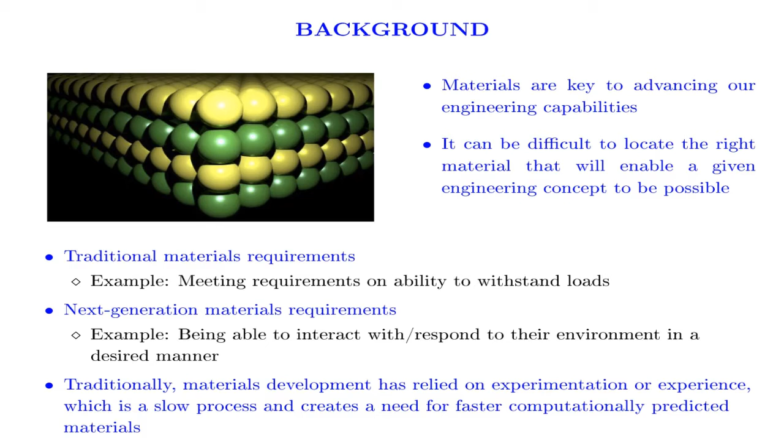The advancement of engineering capabilities are often tied to the materials used. It can be difficult to identify the right material that can make an engineering concept a reality. Traditional material requirements focus on properties such as withstanding a certain load, while next generation materials demand dynamic requirements, such as responding to their environment in a certain manner. Traditionally, materials development has relied heavily on experimentation or the experience of individuals, which can be a slow process and creates a need for faster methods such as computationally predicted materials.

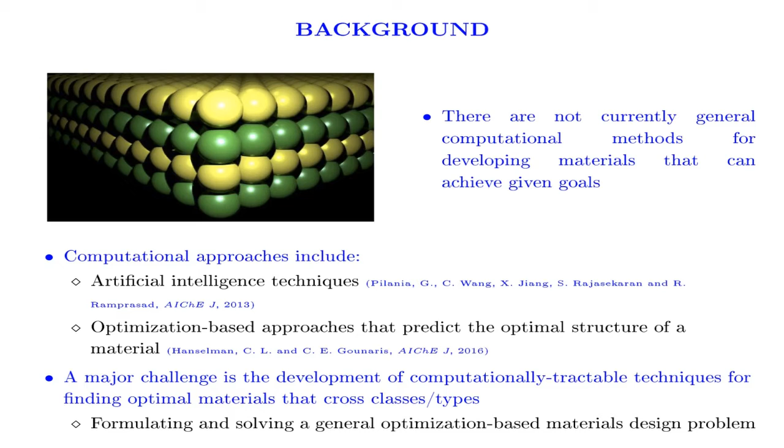There are not currently general computational methods for developing materials. The above mentioned computational approaches include artificial intelligence techniques and optimization based approaches that predict the optimal structure of a material. A major challenge with finding optimal materials, irrespective of class or type, is the development of computationally tractable techniques.

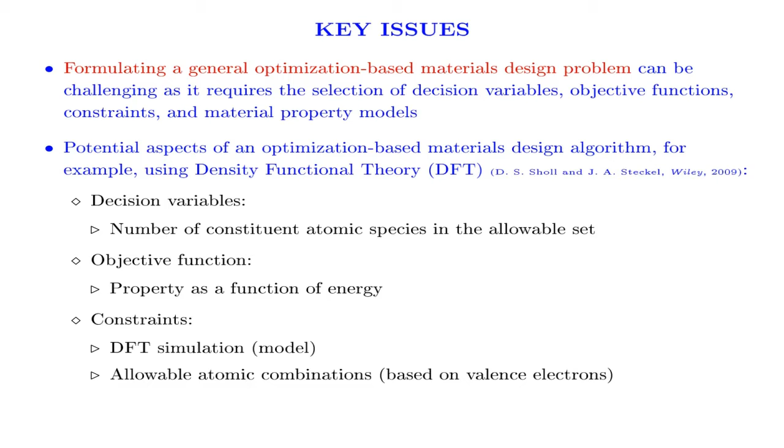Formulating a general optimization-based materials design problem can be challenging as it requires the selection of decision variables, objective functions, constraints, and material property models. If the material model is determined using density functional theory, or DFT, then the number of constituent atomic species of the molecule represent the decision variables. The objective function can be represented in terms of ground state energy, and the constraints include the molecular model obtained from DFT and all allowable atomic combinations based on the number of valence electrons.

As illustrated earlier, if the optimization based materials design algorithm utilizes a molecular model based on DFT, then the ground state energies of molecules can be determined. However, there are potential challenges we see with using this method: first, computational tractability; second, the solution obtained may not be highly accurate, as molecular inputs require experimental validation which may not be available, especially while dealing with new materials. Other reasons for inaccuracies include insufficient K points, inaccurate Bravais lattice specifications, or pseudopotentials.

Despite these model inaccuracies, a material predicted by an optimization based materials design algorithm solution should be robust, or in other words, have the expected properties in practice. Robustness should drive model selection and optimization based materials design formulation. Robustness in optimization based techniques has been a topic of interest in various areas of process systems engineering, and it would be expected that techniques for handling different concepts of robustness could, in the future, inspire ideas for formulating an optimization based materials design technique.

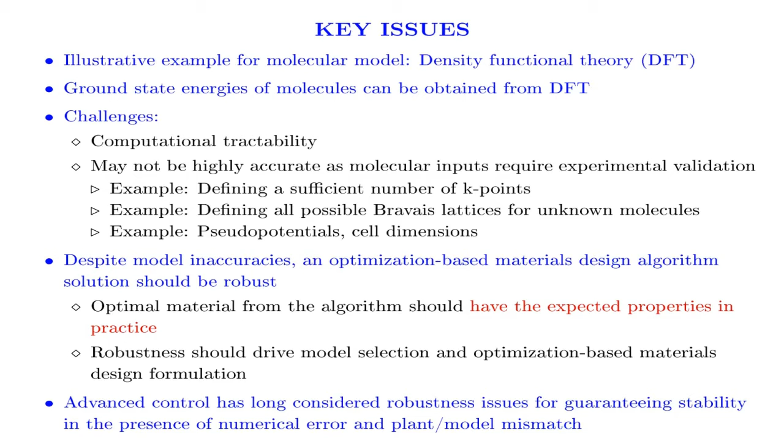Our group generally focuses on chemical process control, where robustness is a concern with respect to stability. Though this is different than the issues that would be faced in robustness with an optimization based materials design algorithm, the remainder of this talk will focus on several issues related to robustness in advanced control that our group has recently worked on. The control theory that we will take advantage of in this presentation is an advanced control formulation known as Lyapunov-based economic model predictive control, or LEMPC. This is a model predictive controller that explicitly optimizes economic performance and incorporates Lyapunov-based stability constraints.

Now that we know the control strategy to be implemented, there are a few assumptions that we make about the class of systems that we will be dealing with. We consider a class of nonlinear systems with bounded disturbances and bounded inputs. The subscript I represents the change in dynamics of the real process. We consider that the origin of this system is stabilizable in the sense that there exists an explicit stabilizing control law h of x that can render the origin of the system asymptotically stable in the absence of disturbances.

The system is stable in the sense that there exists a strict Lyapunov function v for which the time derivative along the closed loop state trajectories under the controller h of x is negative definite for all x in the neighborhood D of the origin. We define omega rho I as a level set of the Lyapunov function in D as the stability region where the state constraints are met.

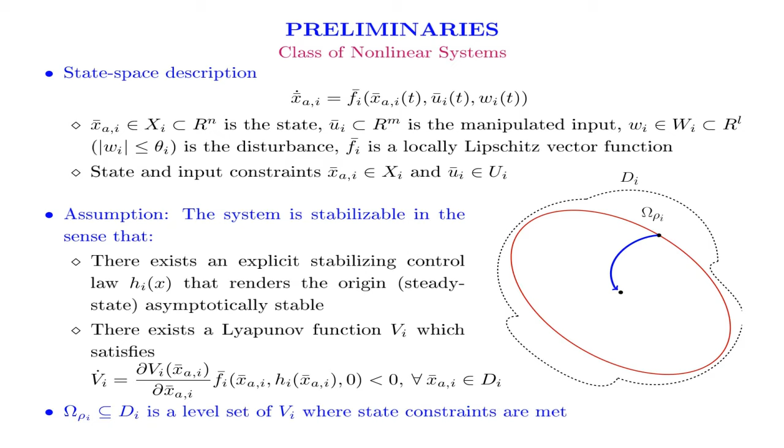The same assumptions as discussed in the previous slide are made on the empirical models. The change in the dynamics of the real process are captured by the empirical model and represented by the subscript q. We define omega rho safe q as the level set of the Lyapunov function, in D as the stability region where the state constraints are met. We define an additional region omega rho q within omega rho safe q to account for the changing dynamics of the process.

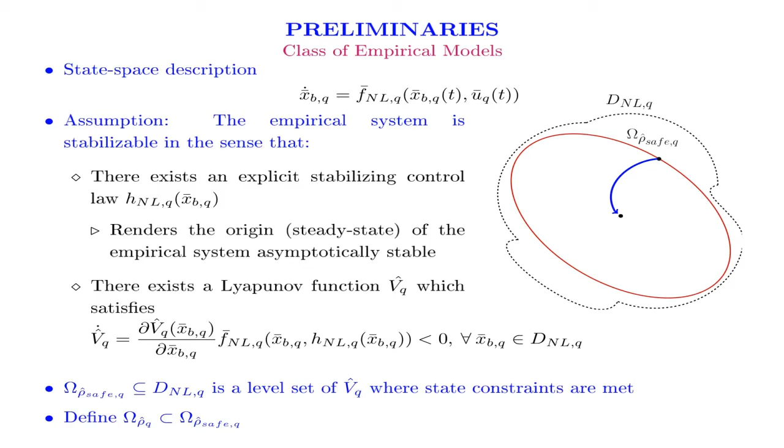Now that we have defined our class of systems, we can look at how LEMPC can be used on a nonlinear system whose dynamics change with time. The LEMPC formulation here uses the subscript q to indicate the change in the dynamics of the empirical model to emulate the dynamics of the real process. The economic cost function is given by the first equation, which is subject to the constraints defined by the empirical model, the state and the input constraints, and finally the Lyapunov constraints highlighted in red and blue.

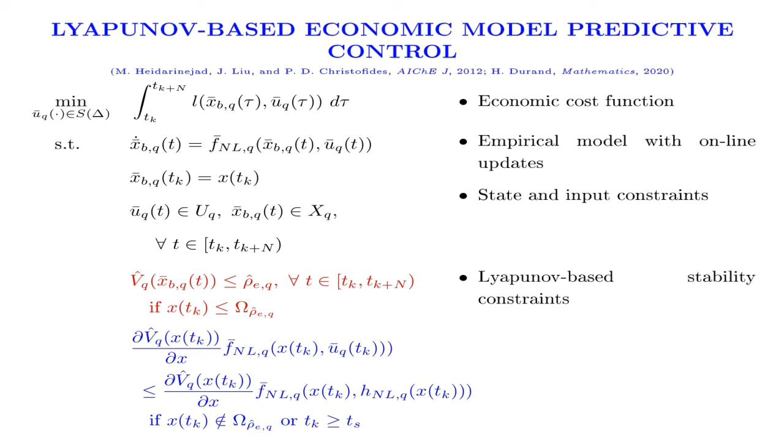LEMPC is a two-mode advanced control strategy. In this slide, we look at the mode 1 operation of LEMPC. A Lyapunov-based explicit stabilizing controller h_NL,Q is used to design the stability constraints. LEMPC may operate the system in a time-varying fashion while maintaining the predicted state trajectory in the region omega rho hat EQ, which is a subset of omega rho hat Q, thus guaranteeing closed-loop stability in the region omega rho hat Q.

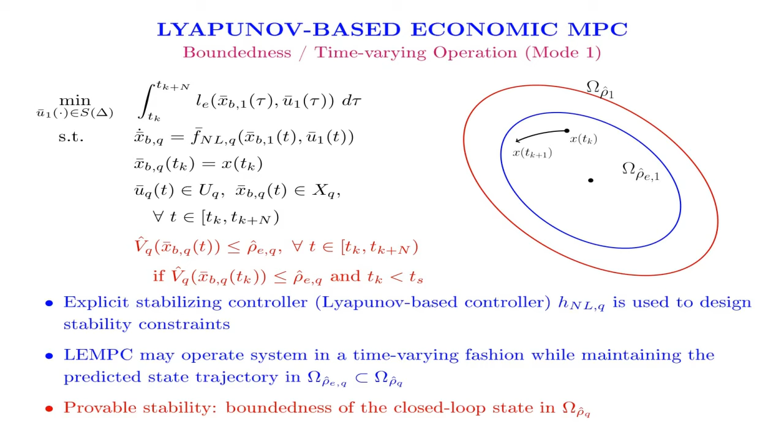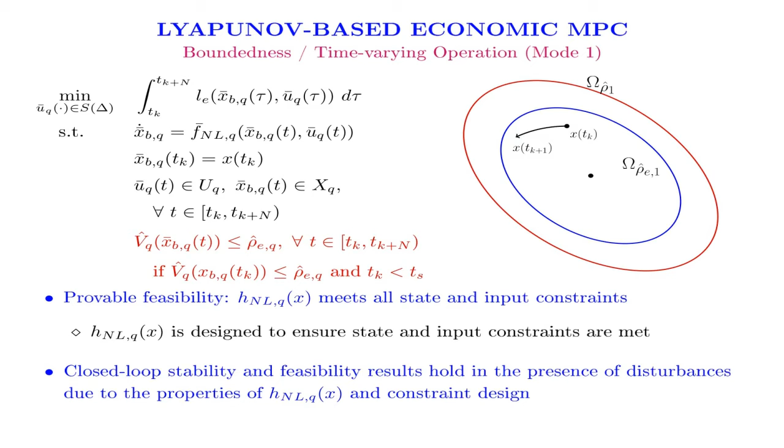The Lyapunov-based explicit stabilizing controller HNLQ is designed to ensure state and input constraints are met. The closed-loop stability and feasibility results hold even in the presence of disturbances due to the properties of HNLQ and the constraint design. The Mode 2 control action of LEMPC ensures that the computed Lyapunov-based explicit stabilizing controller HNLQ decreases the value of the Lyapunov function.

If applied consistently, this constraint could drive the state to a neighborhood of the steady state equilibrium point, thus maintaining the feasibility and stability requirements of the system.

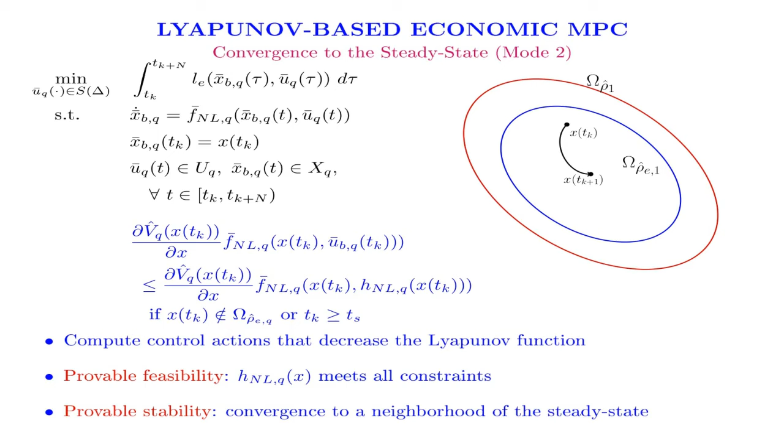Now that we have discussed the original formulation of LEMPC, we look at a case where numerical error is introduced to the control system. A truncated Taylor series approximation of the solution to a nonlinear process with the same characteristics as described in the class of systems and under the control action of LEMPC is used to demonstrate the handling of numerical errors. The Taylor series truncation error is used to derive the relationship between truncation error and closed-loop stability conditions.

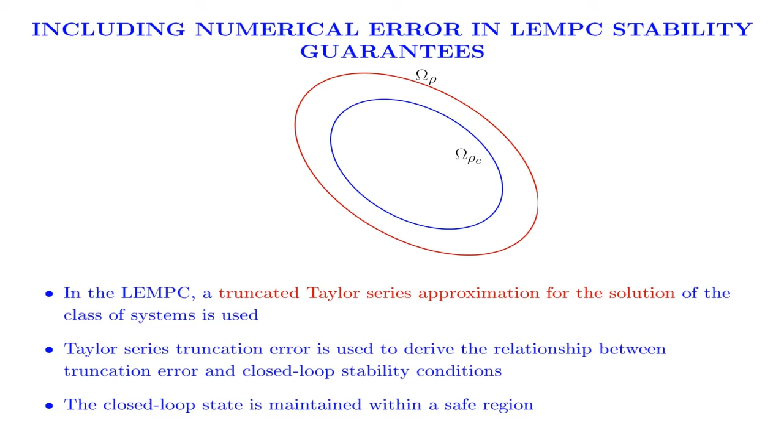The closed-loop state is maintained within a safe region using the LEMPC formulation. In order to illustrate this, we use an example of a standard CSTR with a general second order exothermic irreversible reaction A gives B, whose state equations are listed here. The control objective is to regulate the process in an economically optimal time varying fashion while maintaining closed loop stability.

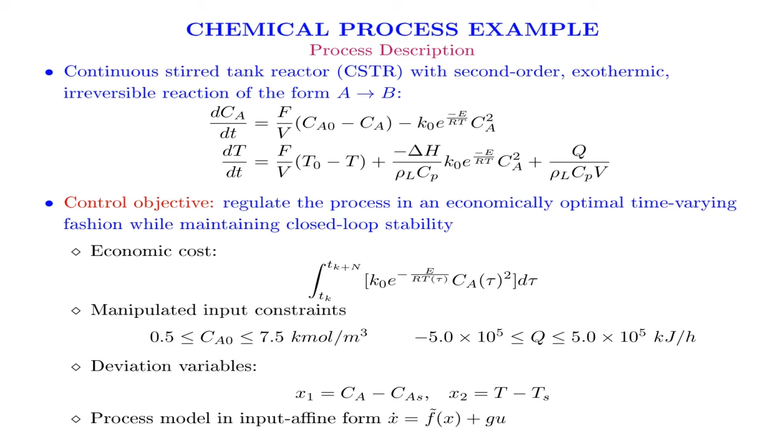The economic cost is to maximize the conversion of species A. The manipulated inputs are Ca0 and Q, and the process model is assumed to be input affine. The Lyapunov-based controller is determined using Sontag's formula.

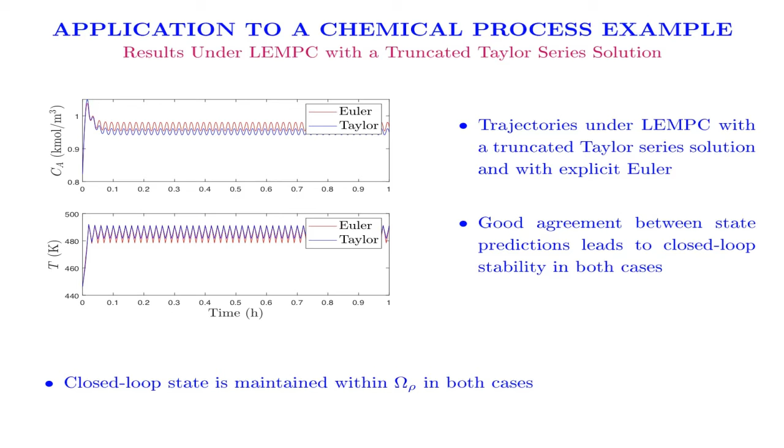The plots compare the states of the system under LEMPC with a truncated Taylor series solution against an explicit Euler. A good agreement between the state predictions leads to closed-loop stability in both cases. Closed-loop state is maintained within omega rho in both cases.

The changes in the underlying process dynamics may warrant an online model update. The closed-loop stability and feasibility guarantees rely on the accuracy of the empirical model, and the closed-loop state may leave the stability region omega rho hat q if there is a significant plant model mismatch.

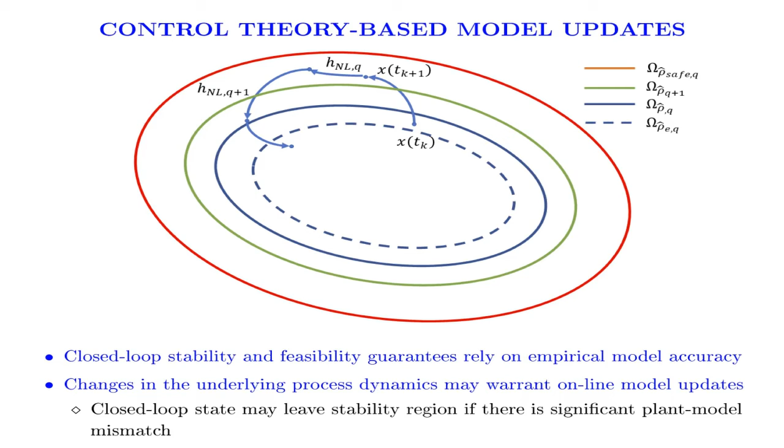LEMPC is designed to maintain the closed loop state in omega rho hat q, which is a subset of omega rho hat safe q. However, if and when the closed loop state x of tk leaves omega rho hat q due to a change in the process dynamics, the LEMPC ensures that there is a certain amount of time before the state leaves the region omega rho hat safe q.

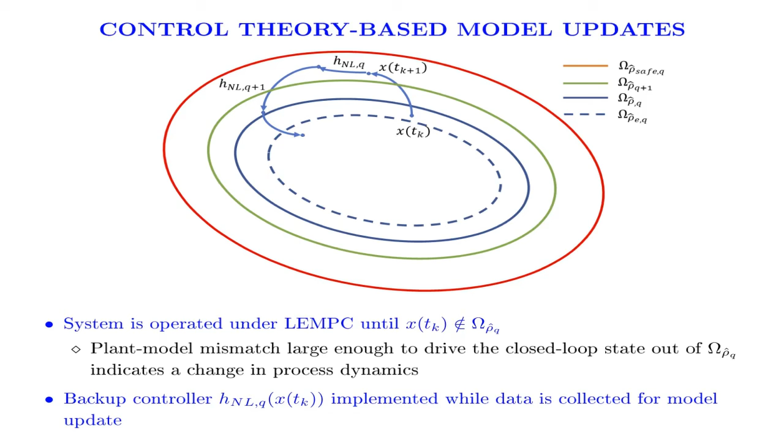The system is operated under LEMPC until the state x of tk leaves the region omega rho hat q due to a change in the process dynamics. The backup control action given by HNLQ based on the last model of the real process is implemented while data is collected to update the model.

Once enough data is collected, the backup controller HNLQ and the stability region omega rho hat q are both updated to HNLQ plus 1 and omega rho hat q plus 1 respectively. The controller HNLQ plus 1 is switched if the state x doesn't enter the new region omega rho hat q plus 1 after the model update.

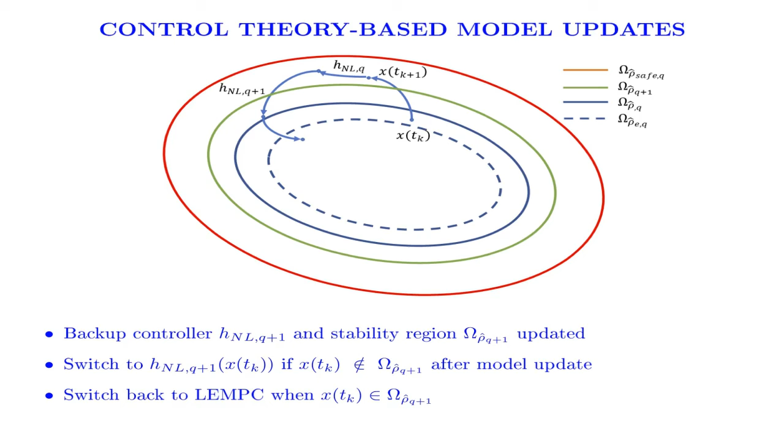If, however, the state x enters the region, then we switch back to LEMPC control action. To summarize, the closed loop stability and feasibility guarantees imply that the state will remain in the region omega rho hat q under normal operation. When the plant model mismatch crosses a certain threshold, the state will leave the region omega rho hat q but

not omega rho hat safe q, and a backup control action is implemented based on the last known model of the process. The state will return to the region omega rho hat q plus 1 under the updated stabilizing control action of HNL q plus 1 when sufficient data is collected. In such a case, we switch back to the LEMPC control action.

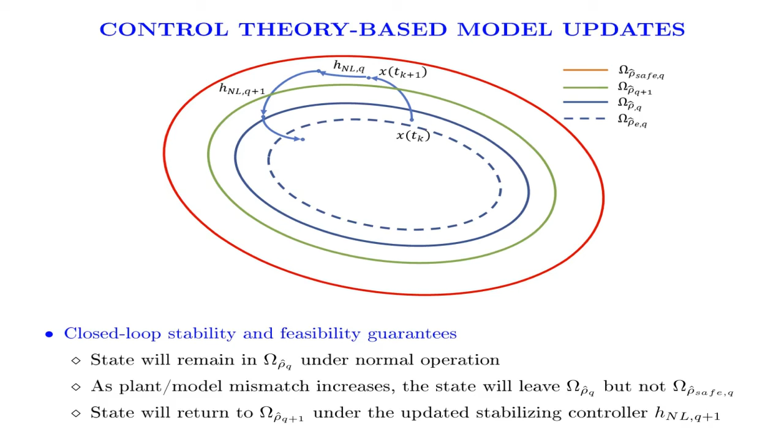Now, we move on to discussing the robustness of a system fed with false sensor measurements. Traditionally, sensor noise has been considered in robustness concerns. This has been extended to cyber attacks on sensors without trying to differentiate between attacks and changes in the underlying dynamics of the system.

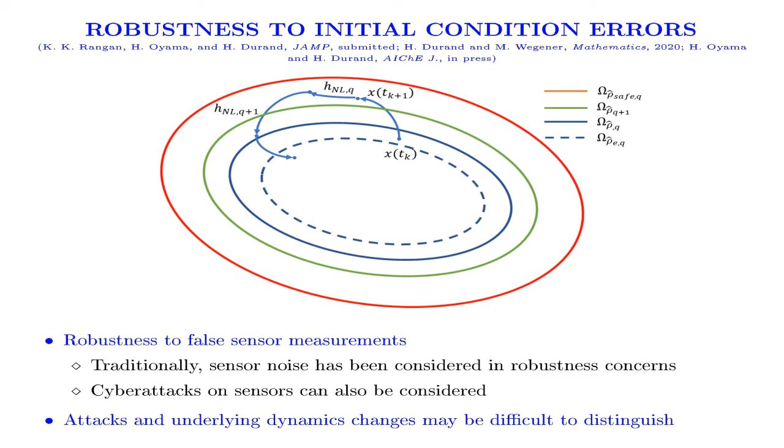Formulations were developed to attempt to detect an attack or model change via the difference between a state prediction and a state measurement, or by the closed loop state leaving a predefined region omega rho hat q. A two-stage detection strategy was consequently developed based on state predictions to prevent the closed loop state from leaving the region omega rho hat safe Q before a certain amount of time passes.

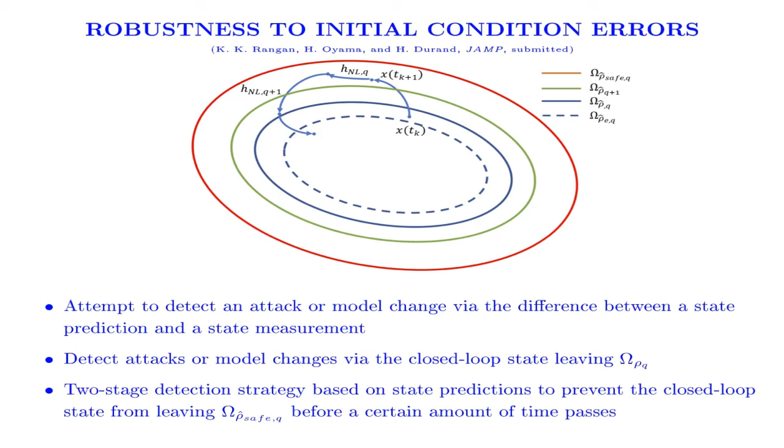If the closed loop state leaves the region omega rho hat Q or an initial detection threshold is reached, the detection threshold is reset and data is collected to re-identify the model. This detection method allows for ambiguity in whether the first threshold breach is due to an attack or a model change, and closed loop state is maintained within the omega rho hat safe q for at least one sampling period for either an undetected attack or a model change.

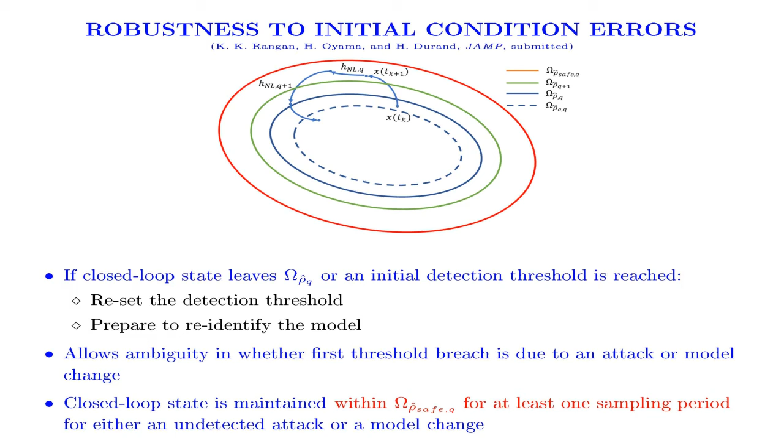To conclude, a key challenge in optimization based materials design is the formulation of a general material selection problem that is robust to modeling error. Robustness has been a concern in a variety of optimization based contexts in process systems engineering in different ways, a few of which were covered in this talk.

Robustness in the optimization based control framework, where closed loop stability guarantees are made under control actions determined from predictions with an inaccurate process model. Second, safety guarantees for LEMPC with an explicit characterization of numerical error. And finally, guaranteed detection and handling of changes to the dynamics of a system.